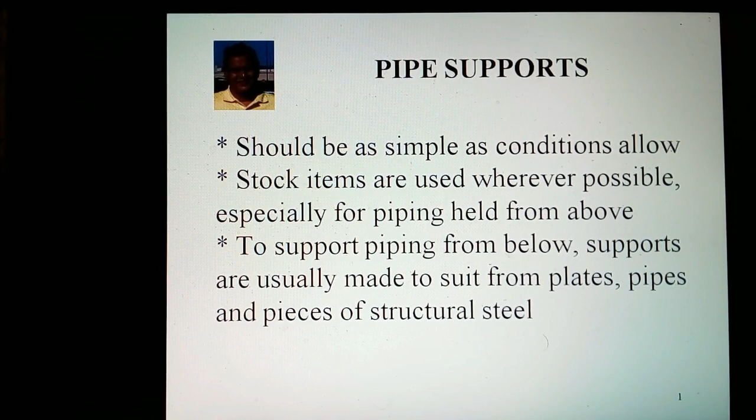This video is about pipe supports. These should be as simple as conditions allow. Stock items are used wherever possible, especially for piping held from above. To support piping from below, supports are usually made to suit from plates, pipes, and pieces of structural steel. Following the hardware is used to create supports.

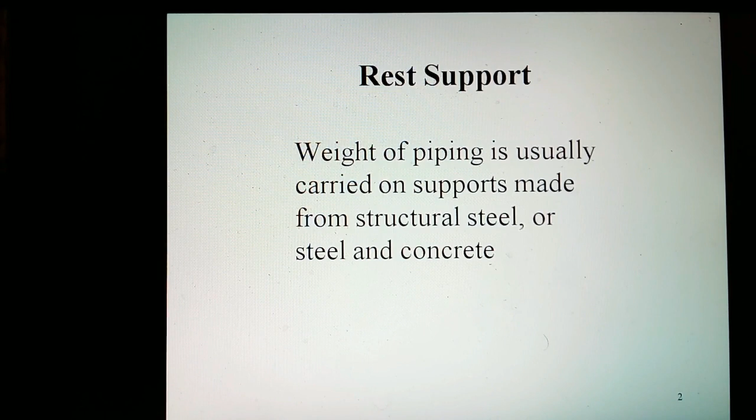Pipe support brackets. This arrangement can carry a load of up to 1,000 kilograms or 2,200 pounds. If the structure is made of concrete, the steel plate is embedded in it. You can support the pipe 1 meter away, and its size is up to 125 millimeter or 5 inch and feet from the structure, with 150 millimeter or 6 inch channel welded to the steel plate. If pipe size is more than that, 250 millimeter or 10 inch channel is welded to the steel plate. In case support such as U-bolt, U-clamp or shoe are there with this support, dimension may be changed as required, case by case.

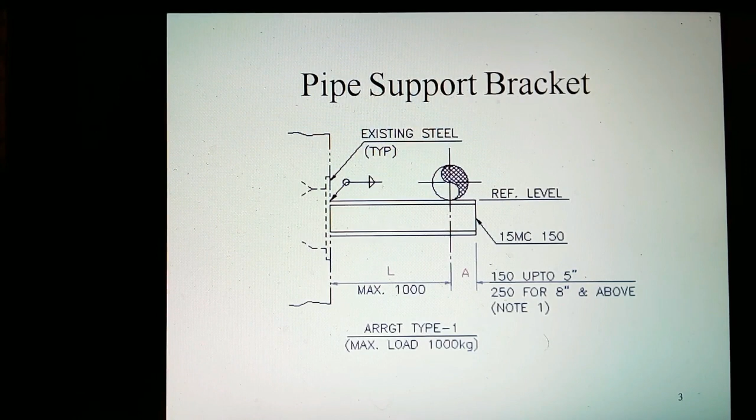If the structure is made of steel structural, support is welded directly to it. You can support the pipe 1 meter away, and its size is up to 125 millimeter or 5 inch and feet from the structure, with 150 millimeter or 6 inch channel welded to the steel structure. If pipe size is more than that, 250 millimeter or 10 inch channel is welded to the steel structure. In case support such as U-bolt, U-clamp or shoe are there with this support, dimension may be changed as required, case by case.

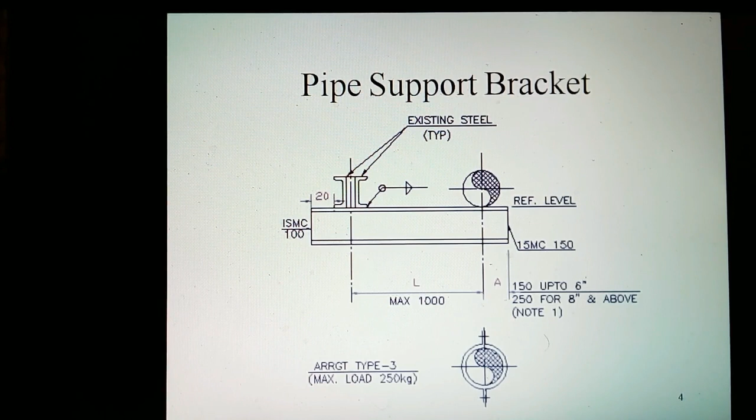If the pipe is in vertical direction, it is supported by 100 by 100 by 8 millimeter or 4 inch by 4 inch by quarter inch angle. Angle is welded to steel structure. A support clamping, such as U-bolt, U-clamp or shoe are provided along the pipe.

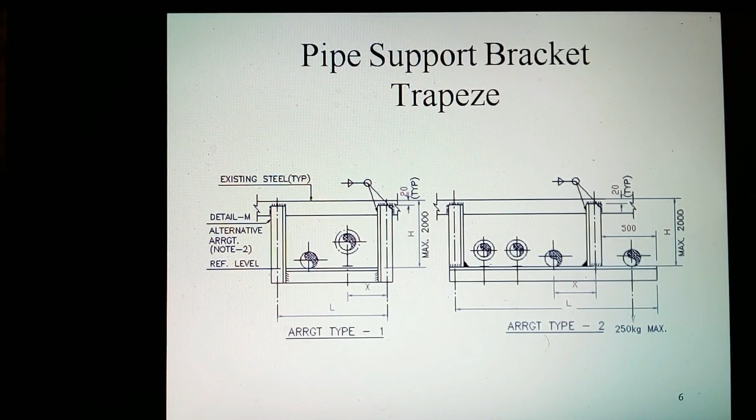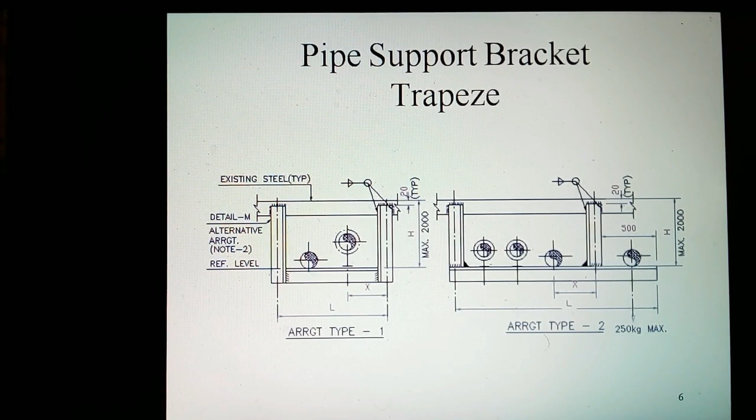Pipe support brackets. These are made of 100 by 100 by 8 millimeter or 4 inch by 4 inch by quarter inch angle. The type depends on the number and size of pipes to be supported. It is welded at the top to a steel structure.

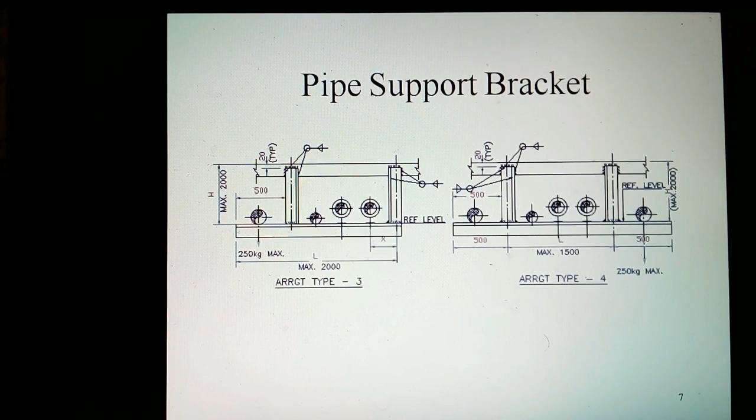Pipe support bracket from pipe 3 inch through 24 inch. The shoe is provided for a hot pipe. It is also covered with insulation material. A hot pipe can run along with other pipes.

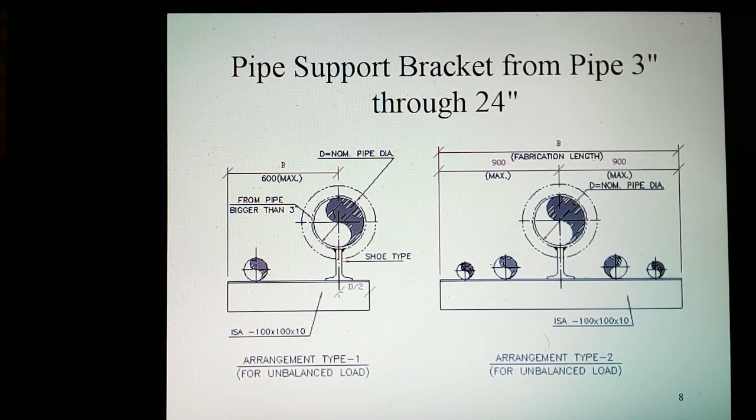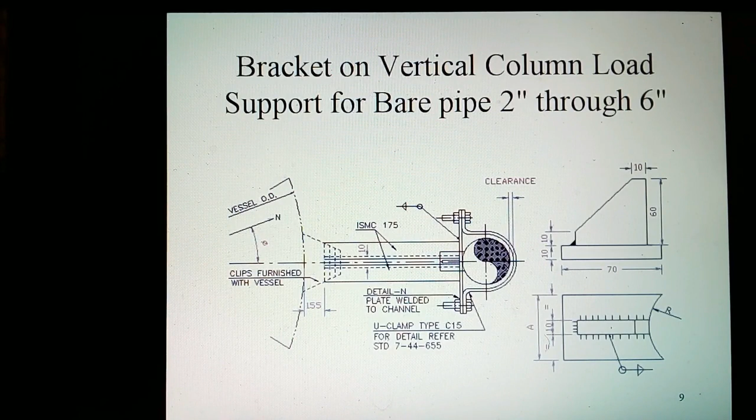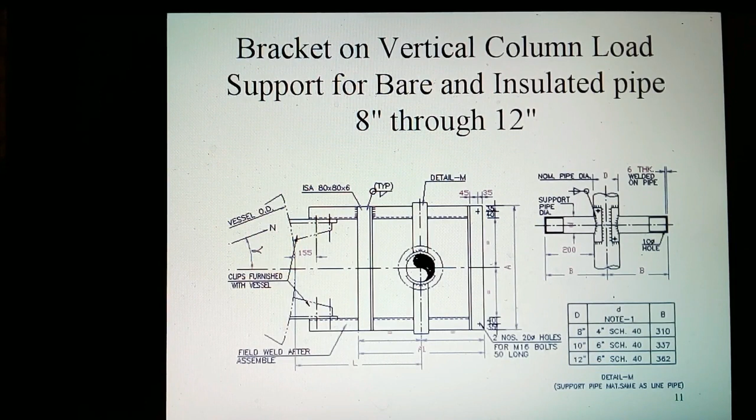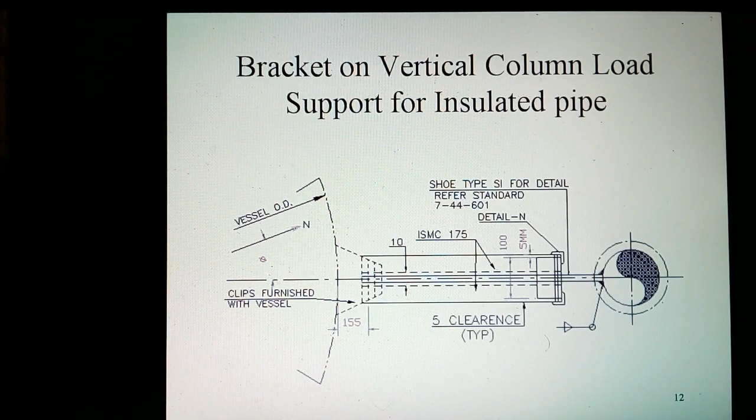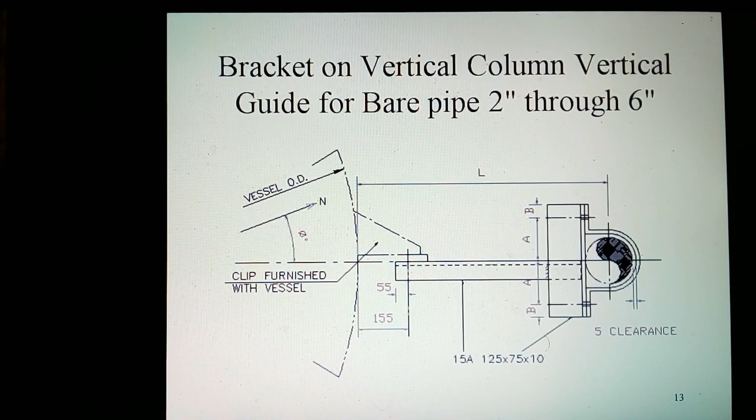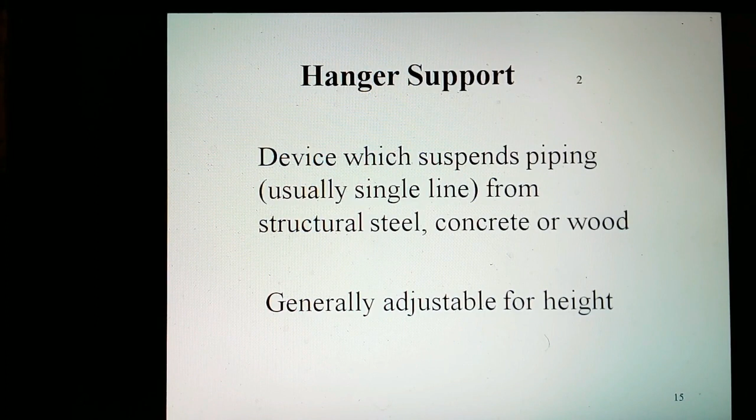A constant load hanger is a coil spring and lever mechanism for allowing movement of piping within limits, and will not change the spring force holding up the piping. No additional force will be introduced to the piping system.

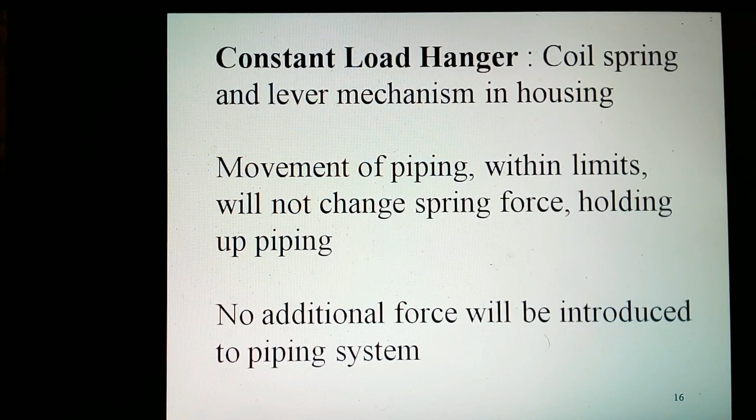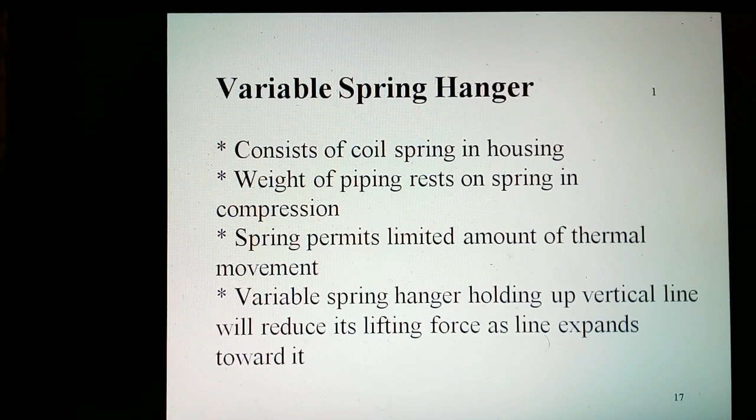The variable spring support would increase its lifting force as the line expands toward it. Both place load on the piping system, and where this is undesirable, a constant load hanger can be used instead.

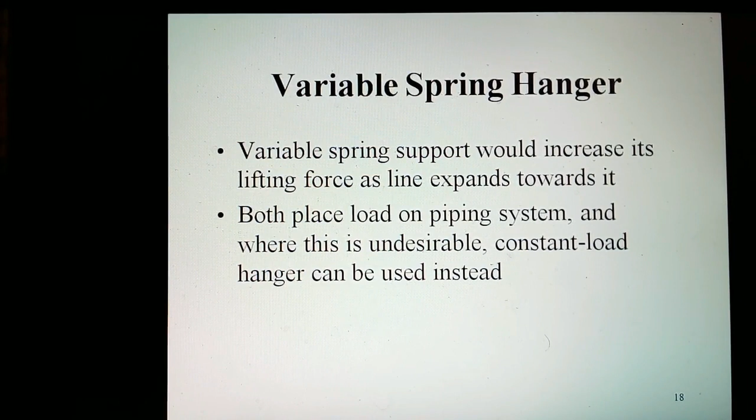Pipe hanger support for bare/insulated pipe, 1/2 inch through 24 inches. The pipe clamp is tied around the pipe. It is supported from a beam. The height from the beam is adjusted by a turnbuckle.

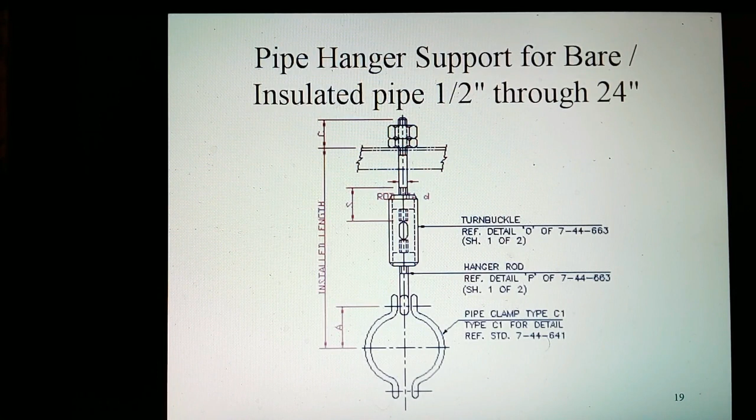Pipe hanger support for bare/insulated pipe, 1/2 inch through 24 inches. This is the same as bare pipe. The clamp is first put on the pipe and the pipe is insulated later. In this case, the height cannot be adjusted, as a turnbuckle is not provided.

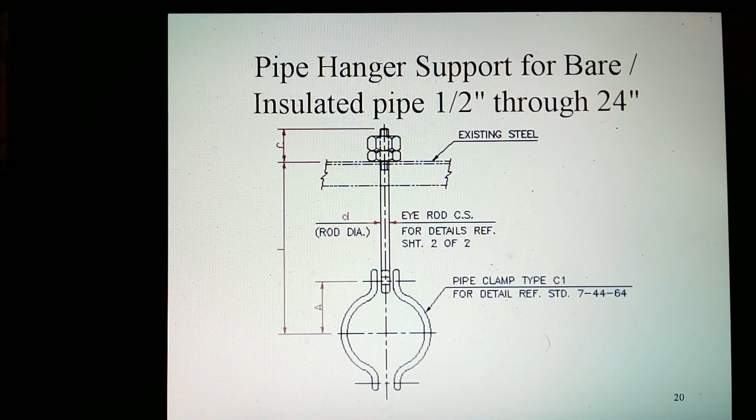Pipe hanger support for bare/insulated pipe, 1/2 inch through 24 inches. This is the same as bare pipe. The piece is first welded on the pipe and the pipe is insulated later. In this case, the height cannot be adjusted, as a turnbuckle is not provided.

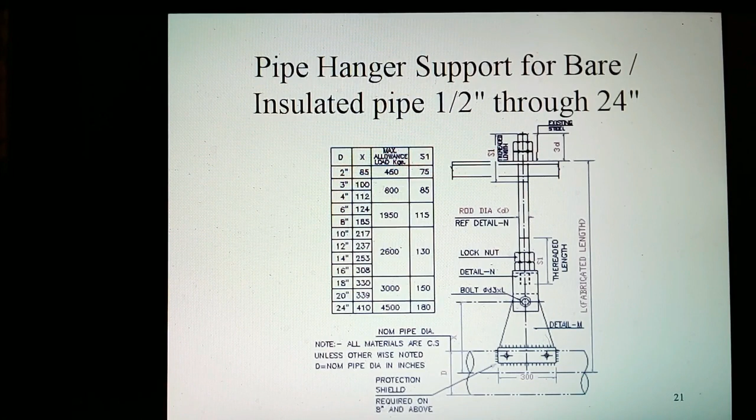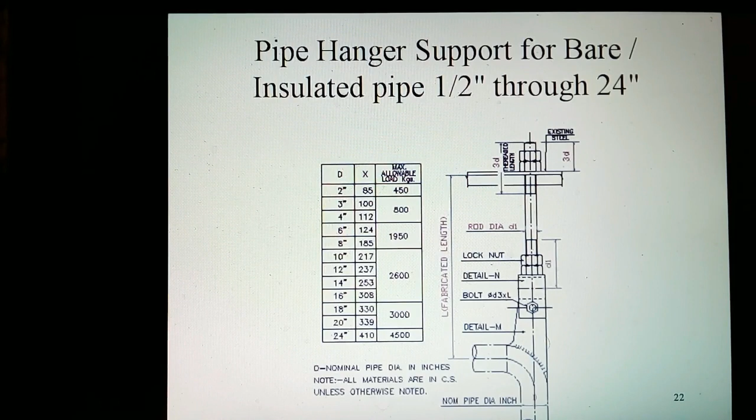Pipe hanger support for bare/insulated pipe, 1/2 inch through 24 inches. This is the same as bare pipe. The piece is first welded on elbows on a pipe and the pipe is insulated later. In this case, the height cannot be adjusted, as a turnbuckle is not provided.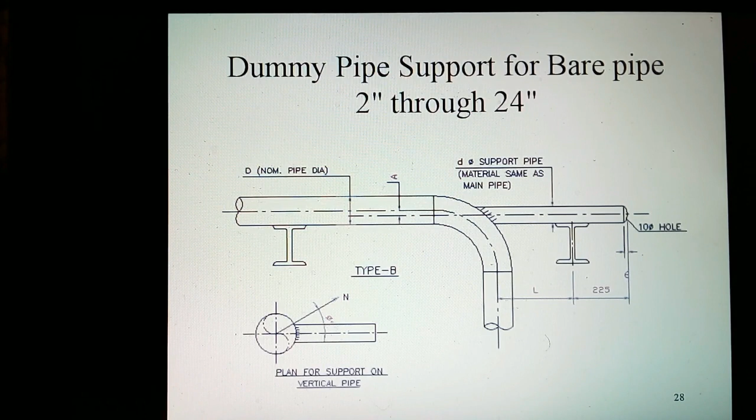Dummy pipe support for bare pipe of 2 inch through 24 inches. This is provided on an elbow, with the pipe going in a downward direction. It is made of pipe of the same material. The pipe is covered at the end with a cap. A hole is drilled in the cap. It is supported on structure.